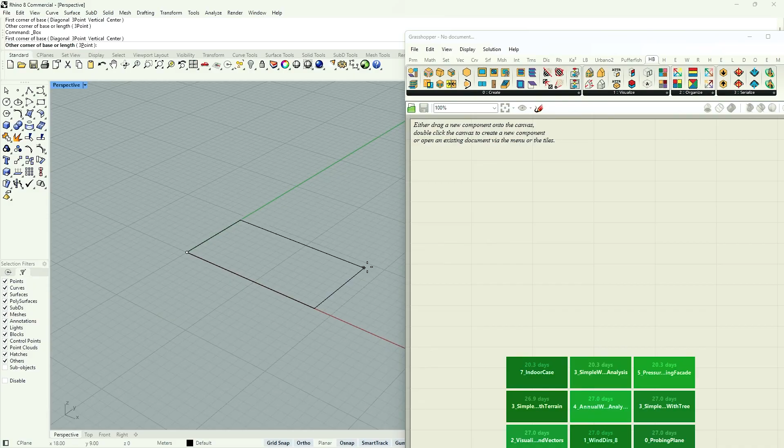We'll keep it simple. So we built one room, and we can make a box. Most rooms are boxes. I would say maybe 10 meters, 15 meters long, 10 meters deep, and maybe around 4 meters tall. Could be a smaller office room. Very simple box, but yeah, that's how we start.

And then we can go into Honeybee. By the way, you have to remember to install Radiance for this, you need Radiance. Here in these drop-down menus we have Honeybee, Honeybee Radiance - we will need this - and Honeybee Energy, which we probably will not use in this. We might use it actually, but let's see.

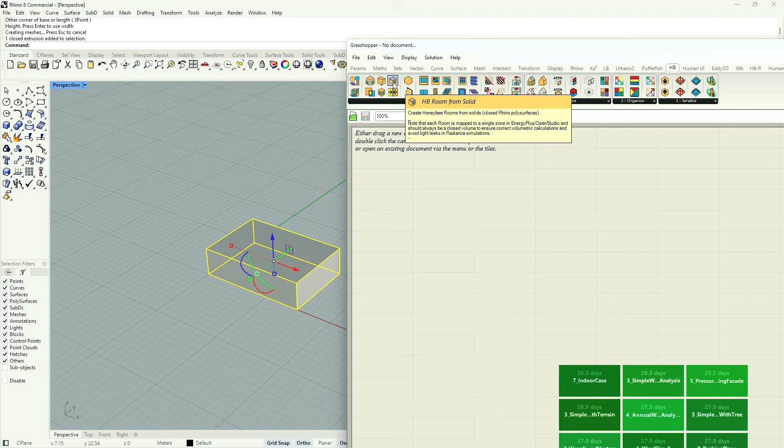First, we need to build a Honeybee model. This is the biggest part of the script. Because we have a box as a room, we can use this Honeybee room from solids. Okay, takes a while. By the way, I need to check my versions here. Yeah, that seems fine, that's how you can check if everything's fine. We're in Honeybee 1.8 and we have installed Radiance 5.4. That should still work, otherwise it will give me an error.

All right, we can put here the geometry. We should give this a name: room 1, right? It needs a modifier set.

So there is modifier set, there's construction set, there's program. The modifier set will actually give us information on how Radiance will work with the room. It depends if it's an indoor or outdoor analysis, and if it's about heat gain, or if it's about the visual aspect.

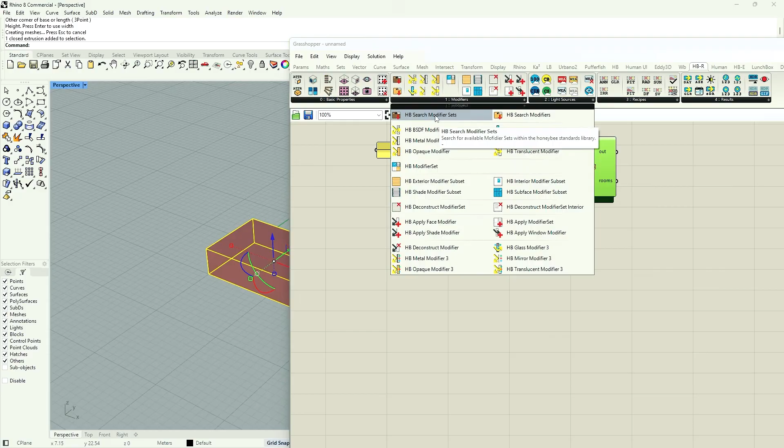So how can we change that? There is a default. What we can do here is go into Honeybee Radiance and check the modifier sets. I explained these quite a lot already, so I will just find a modifier set - there are pre-made modifier sets we can use, and this is this tool here: search for modifier sets. We can create our own set, but we will not cover this in this video.

Now, on how to do this, we can put here a panel and see what's in there. There's not a lot of stuff in here. There's a generic interior visible modifier set. That's what we are looking at. We want to know the interior of daylight.

So how to select this? It's not the best way, but you could use a list item, or have another panel and type interior, and then we see there's two different ones, the interior solar and interior visible. Solar is if we want to check the solar gain.

In that case, we want to have the visible modifier set. So we can type this, and now only one of the sets is shown here. With that, we can put this into the modifier set. We cannot have two different modifier sets. Also, only one is possible here.

Now, we don't need a construction set, because a construction set is about the energy calculations. That would be if we use Honeybee energy. So we don't need that.

Program, I will keep it for now. You can look for programs, definitely, but let's keep it simple, and whatever is in here, that is the generic office program, so it's an office, it assumes this is an office room. Condition, yes, we keep this. It doesn't matter for us anyway, because it's a daylight study, and then we have the roof angle, and that also doesn't matter for us for now.

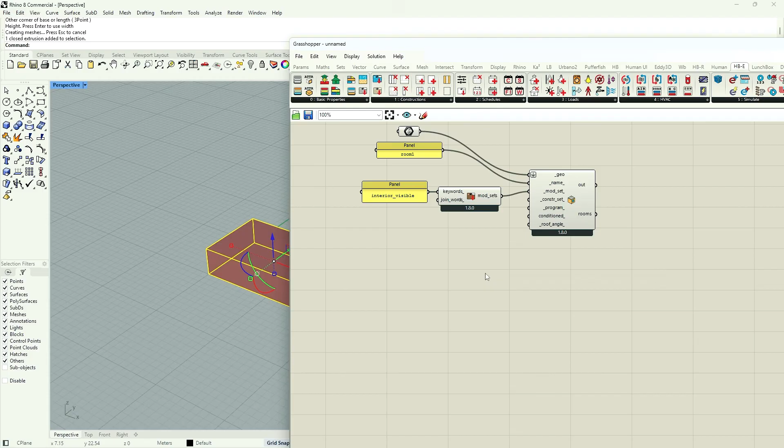As I said, this is a very simple script, but really important.

Now, okay, what's next? We need windows. The most simple possible way would be that if I create now from this room, I could have more rooms here, but in that case I have only one room. Imagine this is part of a bigger building, just like a room on one side of the building, and it has only one side with windows.

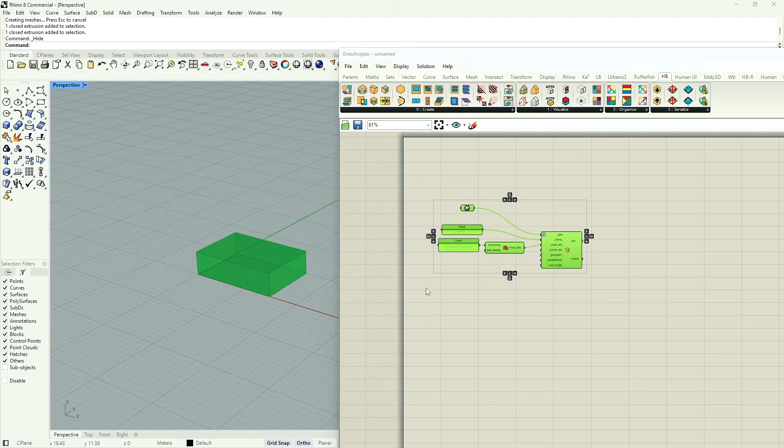First of all, we could give this like outlines, we just see the box wireframe. Oh, sorry, that doesn't work because it needs to come from here. And now we can hide this. Yeah, so this is easier to work now. So this is a tool, it just generates like a wireframe of your room or model.

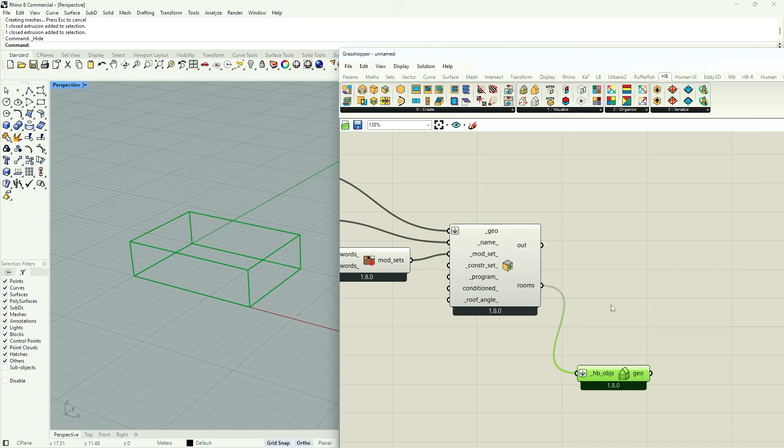It says here Honeybee objects, and a room can go into a Honeybee model. Oops, Honeybee model is this one here. We create a Honeybee model. Without that, nothing really works. So we can put the rooms in here, and that will create our Honeybee model.

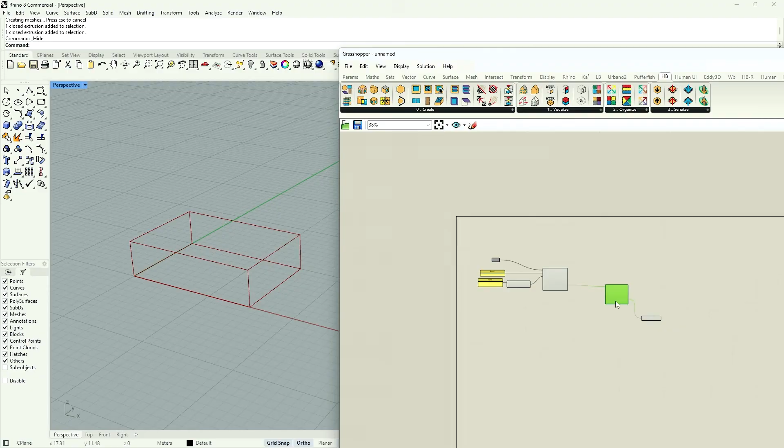And now, ideally, we put this here, because then we can see whatever is plugged in between. All right, so that's how it should look like. For now, we'll just add a window, and we play with the size of the window and the location. And the best way here is to work with Honeybee Apertures by Ratio.

So how that works really is, we have a room, but now we modify the room to have windows. So we go with the Honeybee model, with the room, Honeybee room, into here, and then from here we go into that. What happened here?

We need to first create a ratio here, but there's also a tool which allows us to create a ratio based on the side of the building, and this goes into here. Now it's all 0 at the moment. You can have a slider, and you want to put here a float point slider, and this cannot be 1. It needs to be below 1, so the maximum is 0.99 and minimum is 0.1.

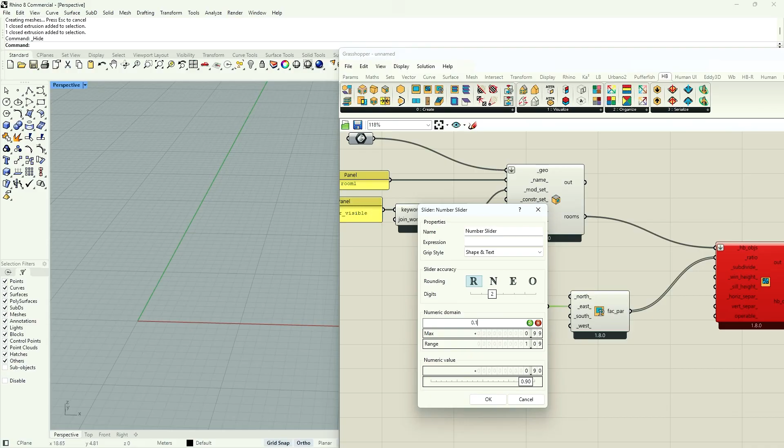And you can see now where that is. That's not good, let's put this to the south side. Okay, disconnect, let's have the south side. So far so good. You can see, because we put our wireframe tool here, we will always see any updates right away. Let's stay with this.

Now we can here decide if we want to subdivide or not. That's just a very simple toggle, a Boolean toggle. If it's false, it's like this. If it's true, it's a subdivision.

That's more realistic, really. The sill height is the height of the sill of the window, so you can shift that, and we can put a bigger number here, maybe 3 meters as a maximum. But yeah, with that we can play as well.

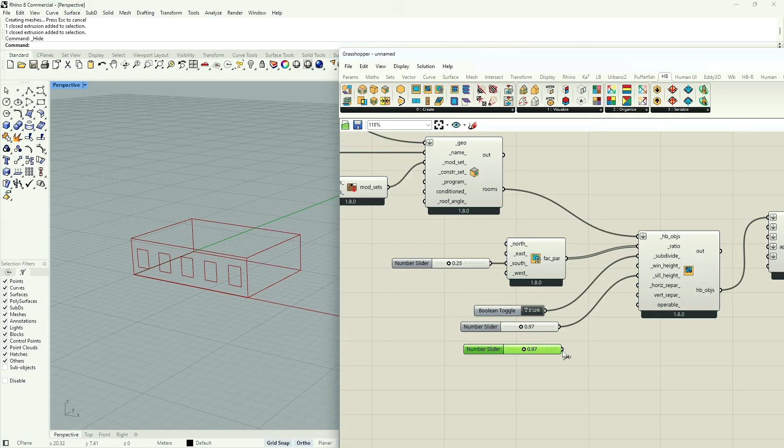And then we could have a separation, horizontal separation, how far is that? And that also influences how many divisions there are. It's a bit strange, but maybe maximum is 4. This doesn't look too bad. So that's a way to change this as well.

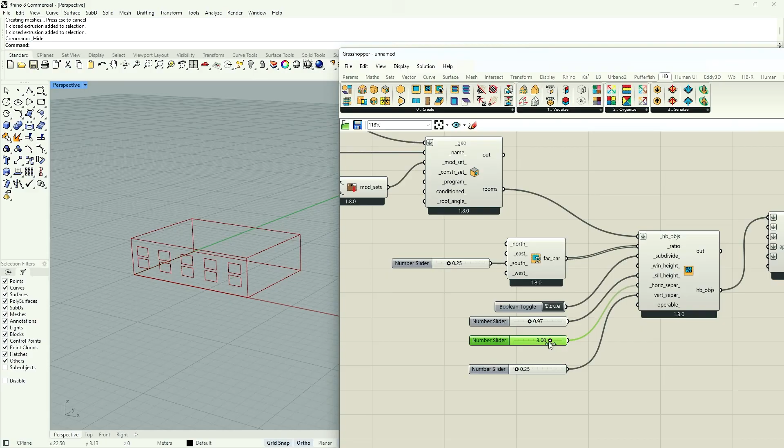And then we could separate that vertically, so we could have another slider here and change that. You can do quite a lot with this, really. You can explore a lot on how you want to divide this, just to make it more realistic.

Now there are other things you can add, but I just recently did a script. If you want to download that, if you don't have enough time, I will provide the link, although it comes with a small fee, because it takes time to put these things together and think about it. But yeah, that would be another option for you. Now this is like the simplest version.

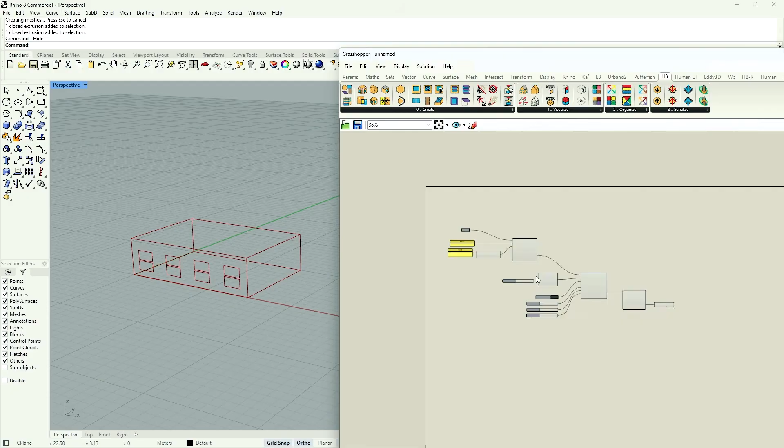Okay, so what does the script really do? What do we really want to know? We want to know, over the course of the year, how much of the time can this room rely on natural light? A typical goal would be 60% of the time.

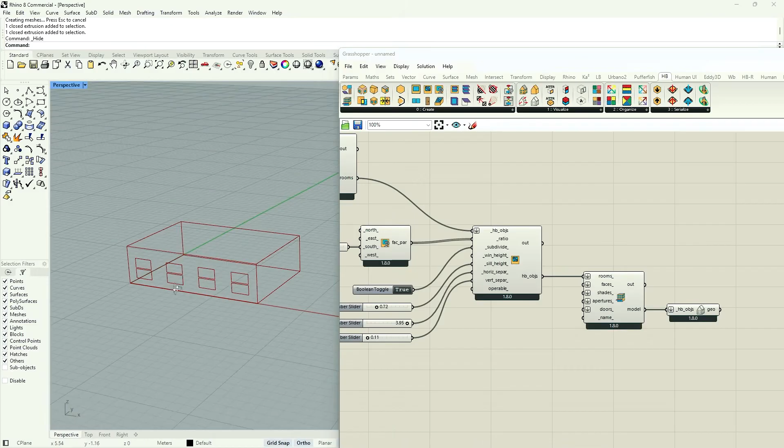But what does that really mean, 60%? In order to measure how this light is distributed over the whole footprint of the room, we need to introduce a sensor grid, measuring per sensor how much light it receives. We could use the radial grid from rooms... oh sorry, actually we want to use the Honeybee sensor grid from rooms.

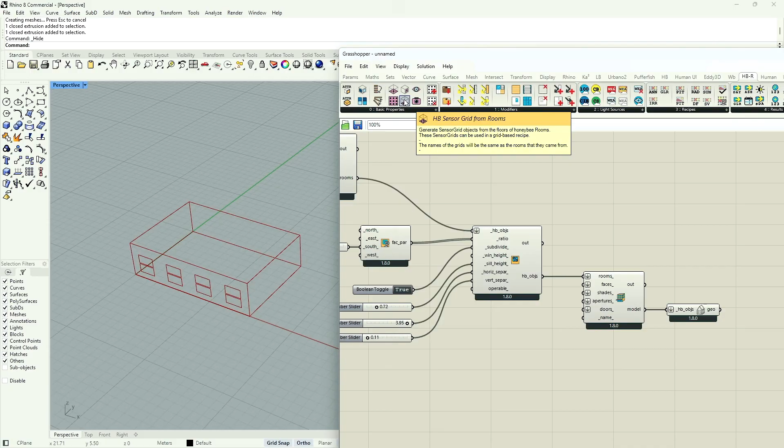So again, we have rooms, we have the model, but this is asking for rooms, so we need to put this here. Now it asks for grid size, which is in meters, so we can use a number slider. I'll put this at 1 meter. 1 meter is good, but we can make it smaller if we want, let's do 0.5 meter, that's fine.

The distance from the floor is also quite important, because imagine this is an office, and it's really about how the light is distributed at the height we will work in that room. If you're standing in a room it might be different, but if we have an office with tables, we might want to push this to 0.9, and our sill height would probably also be around that height.

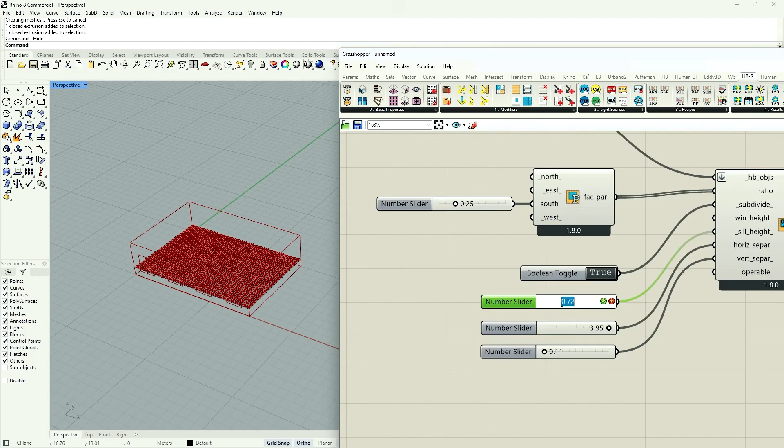Although big windows are great and nice, what we're trying to do is actually minimize the amount of window size, while at the same time optimizing the amount of daylight we get.

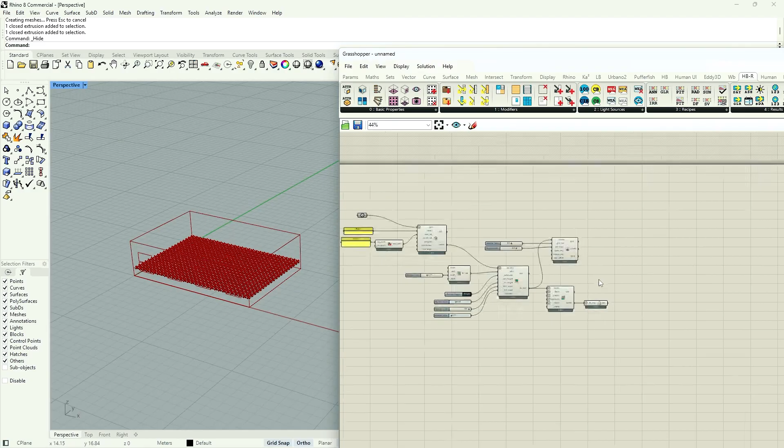Remove points which are outside—that shouldn't actually happen if there's any issue. If your solid is not a perfect box, it could happen that not all of your points are inside, so you would need this remove outside option. You can also introduce a wall offset, which shrinks the grid so there's no overlap of inside and outside.

So you have three outputs here: one is the grid, one is the points, which are the sensor points, and then we have a mesh output. So far so good, that's great. Now let's go to the analysis. We'll probably look at some others as well, but this one is really interesting for me: the Honeybee Annual Daylight. It has quite a lot of different outputs.

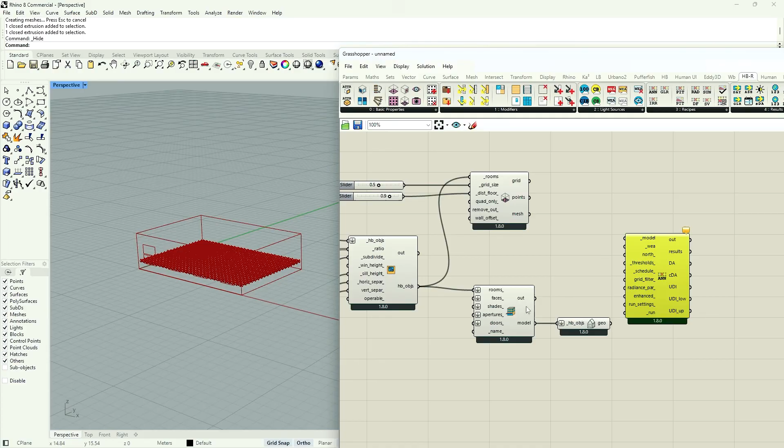It has the Daylight Autonomy, which we just discussed—basically the time on how much each sensor receives daylight over the whole year. In here we can place the model, that's the first thing you can place in here. And we also need a WEA component.

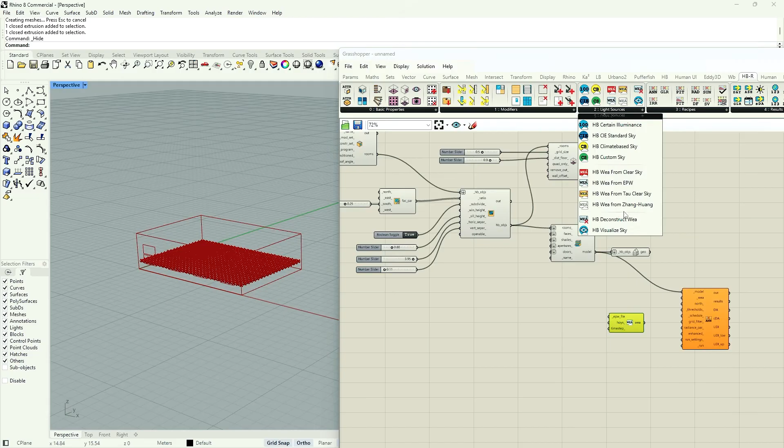It's either a generic clear sky weather tool or from an E+ weather file. I'll use this because it gives us the most accurate, realistic sky from an E+ weather file, but you can also explore the others—any of these would work. For that, we need an E+ weather file, which we can find in Ladybug.

So we need to go into Ladybug... we need this one, toggle, we need a panel here, and if I click this it goes automatically to the map. By the way, if you have any issues with this, not every weather file here works—some are outdated or have no data, but you won't see that immediately. I'll just copy this one; if you run into issues, just try a few different ones until it works.

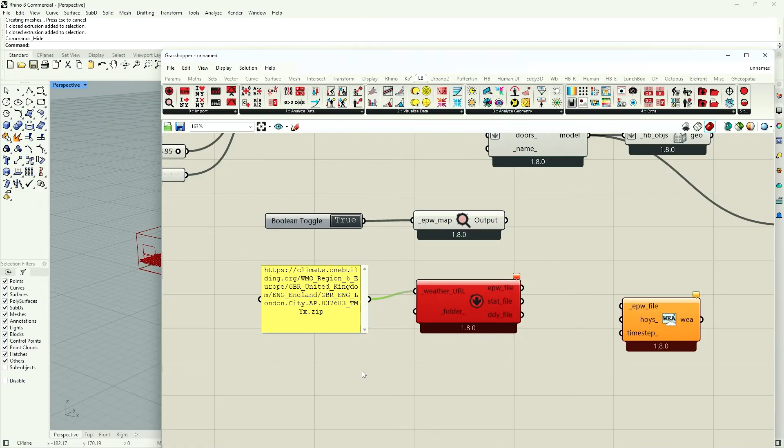There are other pages where you can download E+ weather files. The funny thing is, if we only use this annual daylight study, we actually don't need this in between—this is really just to create a period out of this, where you can adjust the time step. That will actually not work because it's an annual study, not a study over a certain period. So you could go in here like this, or like this, but leave this alone, because this will create a period, and that will not work with this tool here.

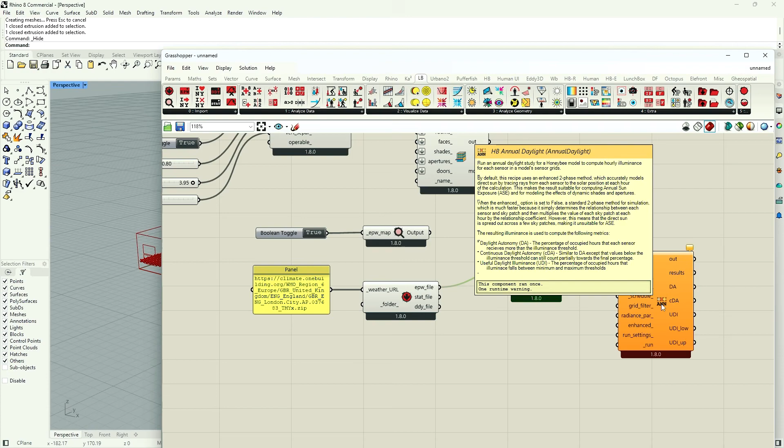Just keep this in mind—it's important because I think some people get this wrong. I definitely got it wrong. So make sure you understand that: it's an Annual Daylight Study, not the 'month of June' Daylight Study.

There is way more in here. I will not touch that. There's the threshold of the useful daylight illuminance, for example.

You can put here a schedule. This is, again, anything with an underscore on both sides is not required input, but it has a default value. If you have more than one room, you can select here with a grid filter. For that, it's very important that your room has a name. Very important, so you can actually filter it out.

You can add radiance parameters here. And this one is important if you run an additional ASE study. At the moment this is set to true. If you set it to false, then it's a more simplified study. So let's keep everything on.

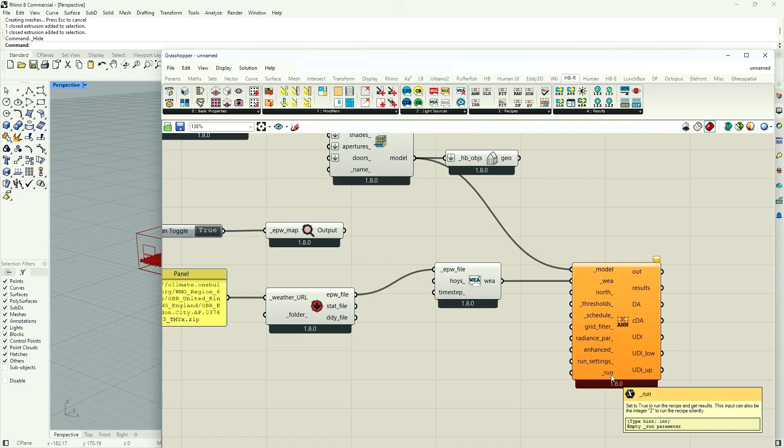And then there are also other run settings here. We can leave that for now, you can read about it. You can have additional settings, we just keep the default here as well. And then there's a run button, a run input. For that we again need a toggle. We can just copy one here.

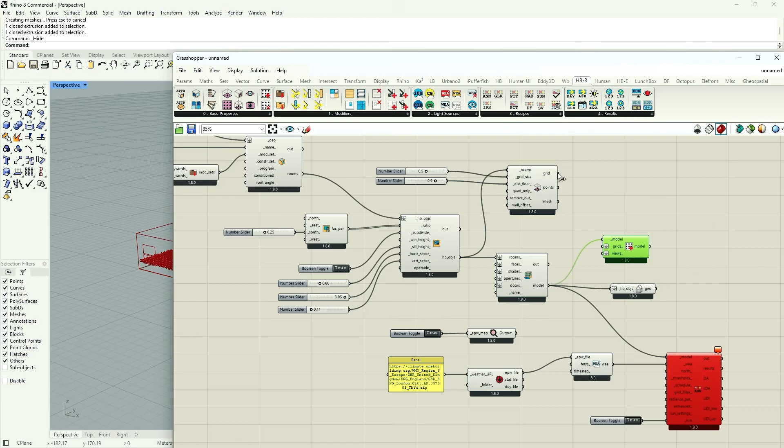Oh yes, of course, I always make this mistake. So we haven't done anything with this. Of course we need to apply this grid back to our model. We haven't really looked at that. And the way we can do this is to assign Honeybee grid. So basically we need to use this, get the model here and get the grid that goes in here, and that goes into the model.

And it's already starting running. So if you see this window, then that's a good sign for you, that means it works. Okay, now you say, oh but there's nothing here. Yes, there's nothing here. Also, let's hide this, don't want to see this now. We have a few outputs here.

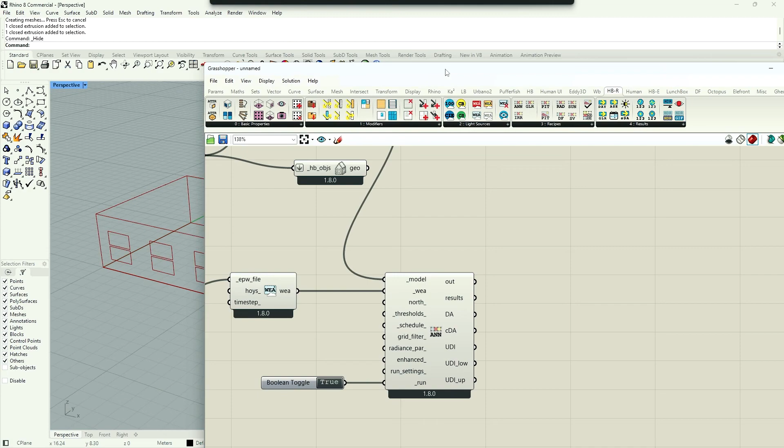That's also probably important. Let's go to Ladybug. And from here we can take the Ladybug spatial heat map. We can put the values here. Still not working, and that's why we have this mesh output here. And that will give us the output.

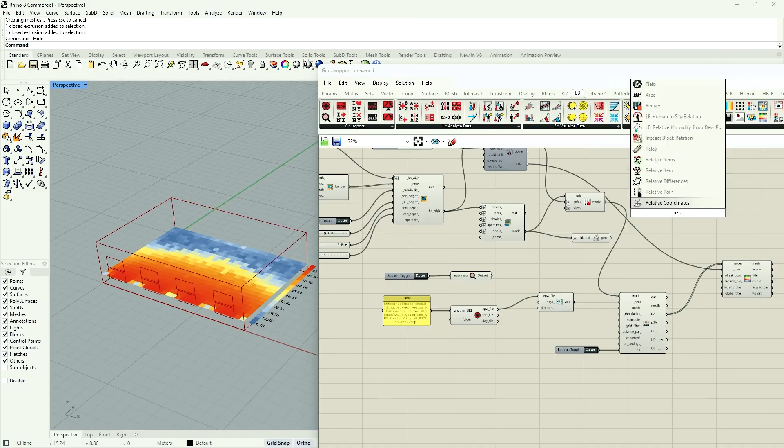All right, so let's put a relay. It's nicer to have a relay. So what can we see now?

We're running a very simple annual daylight study using real weather data from London. And we use a very simple schedule from 8 in the morning to 5 in the evening, weekdays, because it's an office. So we basically created our windows, we created our grid sensors, and now we have an output.

And you can see already there are some areas that are quite blue and others are more red. So okay, now we have a pretty solid script that gives us a nice output. There are actually different outputs here.

So one is the daylight autonomy, this one here, which basically checks the percentage of time it has daylight per sensor point. Then there's another one, called the continuous daylight autonomy. We could put this also in here to see what's the difference. You can read what that all means, but you can see it kind of reaches from 53 to 91. Actually, this is pretty good.

I also changed a bit here. I changed this slider from 0.2 to 0.24 to 0.3, and I also moved the sill height a bit upwards. If I do this even more, let's see what happens.

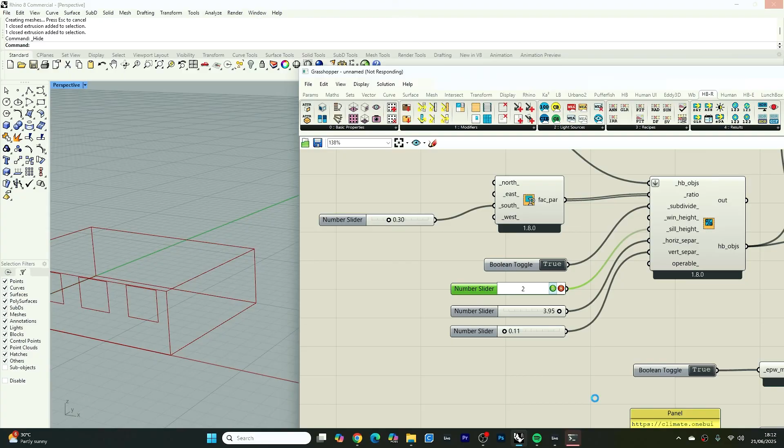That's actually even better. You can see that it lowers the ones which were already in the red zone, but it increases the ones which are more blue. Actually it lowers the ones which are blue. So that's really good, that's quite good already.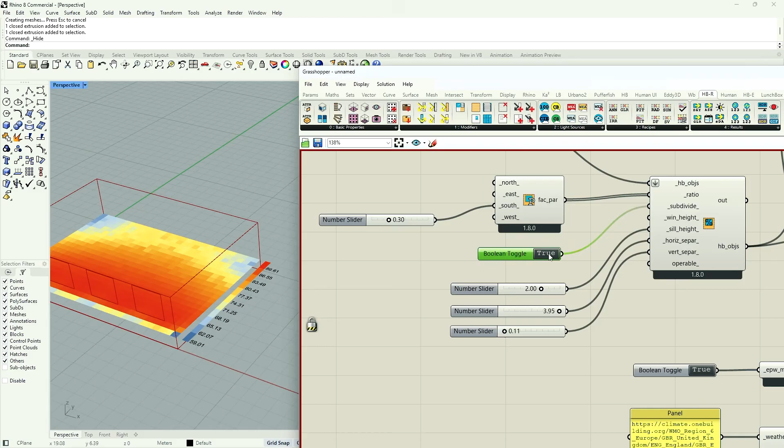I mean, we could play a bit more and see how this would be if it's just one continuous window, more on the top. Let's try that just very quickly to see how that works. We could go on true, false, and let's turn this off for just a moment so we can test this a bit.

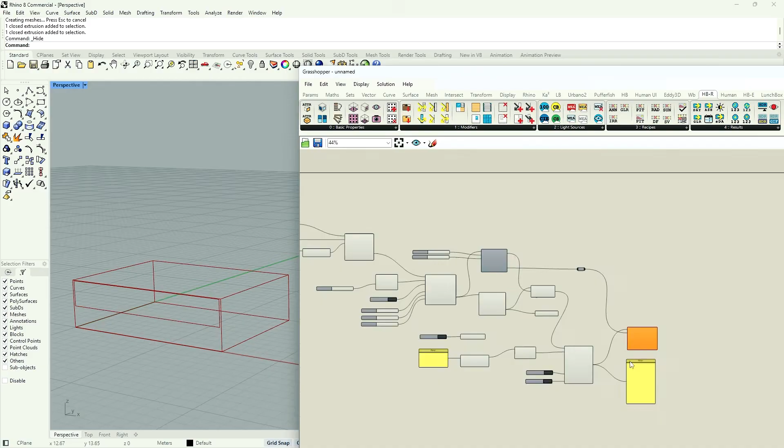Interestingly, it doesn't do anything. That's really weird. If it's not separated, not divided, it just creates this. That's interesting. Okay, let's change this back. It's more interesting if... well, we can just try something like this. I don't know what that gives us, but yeah, let's see.

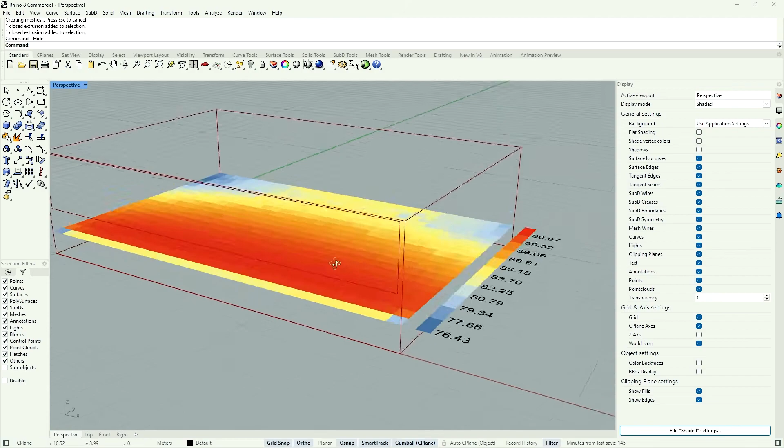So just testing what happens the further up the window is and how that influences the output. Very often buildings have the glass at the lower side, like floor-to-ceiling glass, which is great, it looks nice, but actually it has less effect. See, the further the window is up, the better. And at the same time, it makes sense to keep it.

So if we would do now the opposite, so we put it on the ground, we could move the sill height down. Let's see what happens. Oh no! Stop, that's not what I wanted. Okay, let's have this on the lower end.

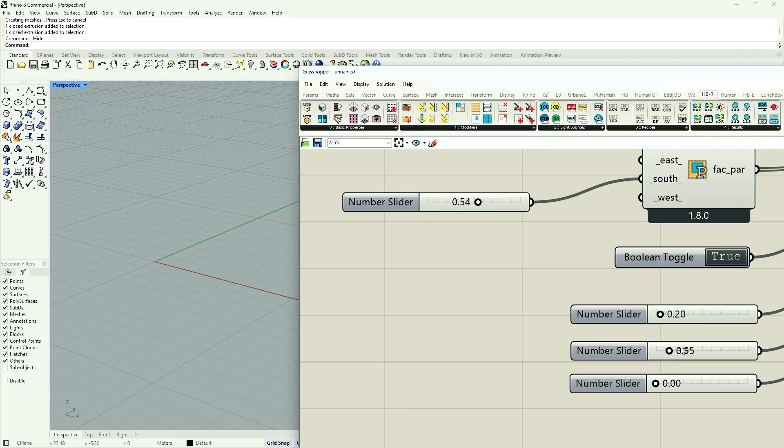Some architects think this is really cool, to have it on the lower portion. Let's run this again. Not too bad, but not as good as the other way around. So you might get your floor lit quite well, but then everything in the corner and the back is much more dark. All right, okay. So, but now, is there a way to look at the average?

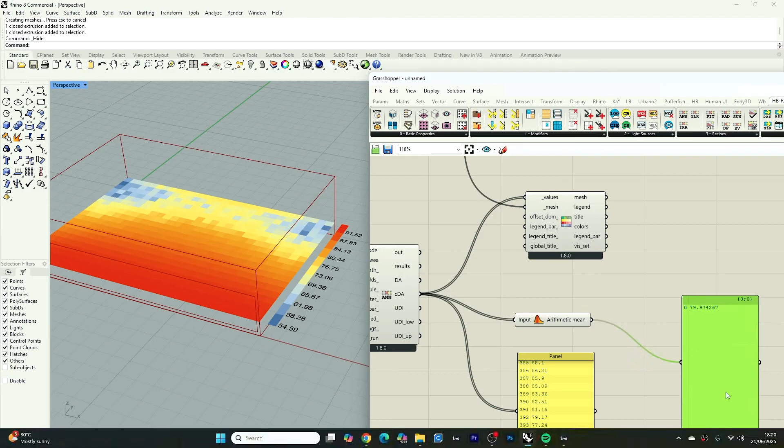So now if I go here and use average, put here the panel. Yes, it's average 80%. Sounds really good. But then we have these ones which are actually darker, quite dark. Not so dark really, because we have this really big window.

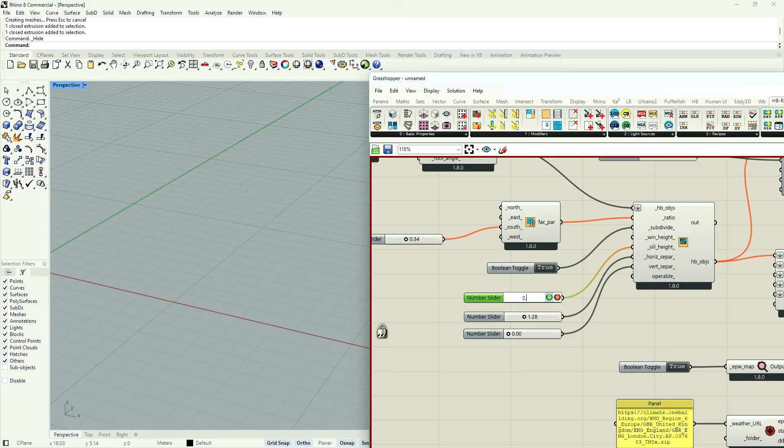So let's go back to a more typical version, which is 0.3, and of course we also want to minimize that somehow. And then this one, sill height 0.8, and let's try this again.

Okay, nobody would build this type of windows. Similar. So the most successful one was where we had the window on the top. Nevertheless, okay, so here's actually better now. You can see it's better, probably because of the windows here on the top.

But is there another way to measure this, the average? So what we could say is that instead of looking at the average of the output, which doesn't give us a lot of control, we could say let's subtract, let's say the 60%. The 60% is our goal.

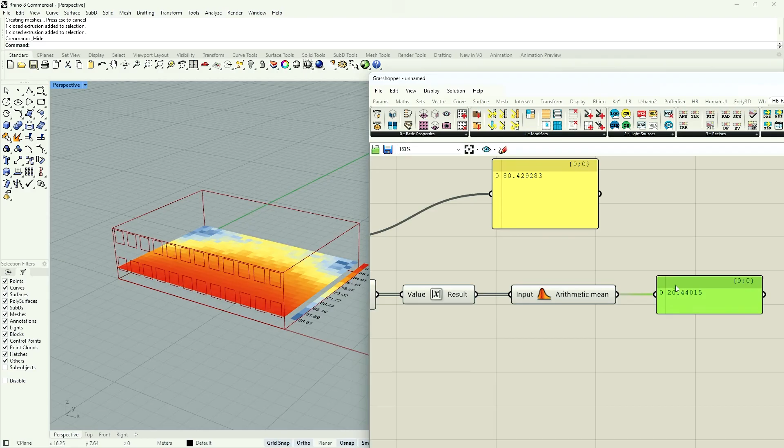We subtract that and we can then use the absolute value. That means we remove all the negative numbers. And from that we go in here, we average everything and we can see where we are. And ideally, we should try to get a number. The smaller the number, the better. This is also a percentage. That means 20% of that room actually don't get enough light.

Now we could argue that ideally a good value would be below 10%, I guess. And if we want to be even more strict, we could go here.

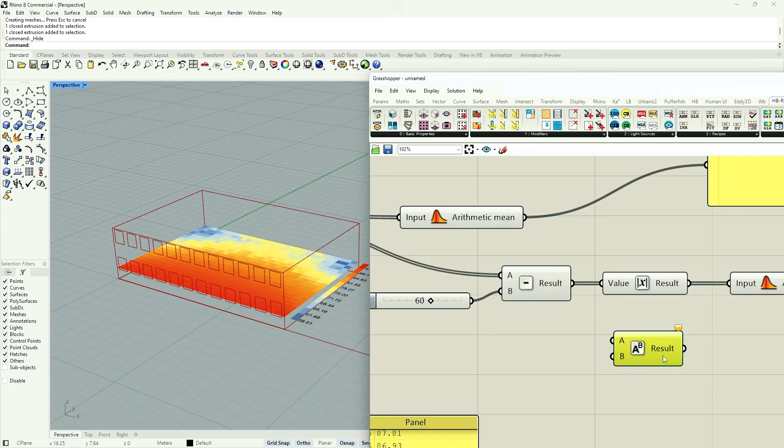Calculate the power. So we call this the average deviation, the mean absolute deviation. This is pretty straightforward. It's pretty good. The lower the average, the better the uniformity near your goal daylight autonomy.

And then what I'm doing here is called the standard deviation. It penalizes extremes more. So if we then go here, we would average this, and then we use the square root. Let's see, there's a bit of a slight difference.

It actually says here 22% is not great. 22% of the room is not great, whereas here it's just 20. So it's a bit more strict. But that would be another way to calculate that.

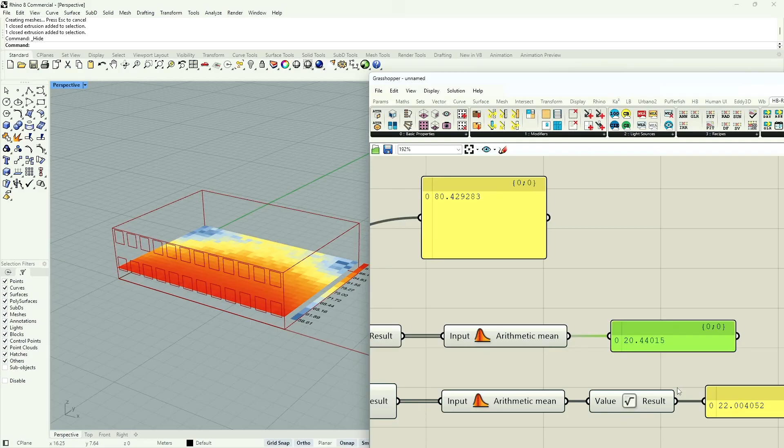So ideally, you can see already that it says here 80%, like the average is 80%, which sounds really good. But actually here, it would be great if we can go lower than the 10%. So the smaller the number, the more evenly the light is distributed.

I'm aiming for a mean deviation of under 10%, or a standard deviation from 22% to be below 10%. Sorry, what I'm aiming for is the mean deviation to be under 10%. That means that most of the points are within about plus minus 10% of the target daylight autonomy. So it's better than just getting the average.

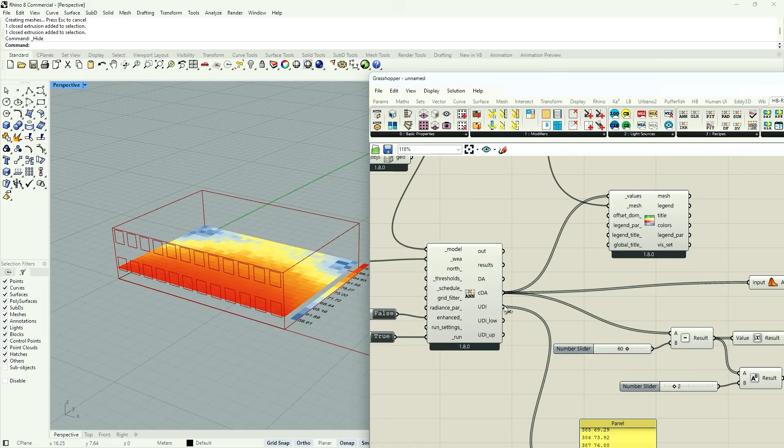Percentage of these points. So the output here is slightly different. Now there's some other outputs here. There's the useful daylight. That does something very similar, I guess. So we could go into this, and you see, okay, useful daylight and less useful daylight, low values and upper values.

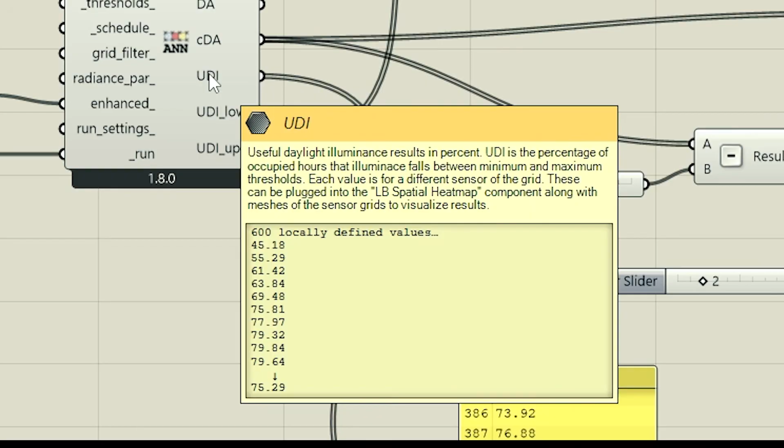So just read through this. The useful daylight illuminance results in percent. UDI is the percentage of occupied hours that illuminance falls between minimum and maximum threshold. Each value is for a different sensor of the grid. These can be plugged into the Ladybug spatial heatmap component along with meshes of the sensor grid to visualize the result.

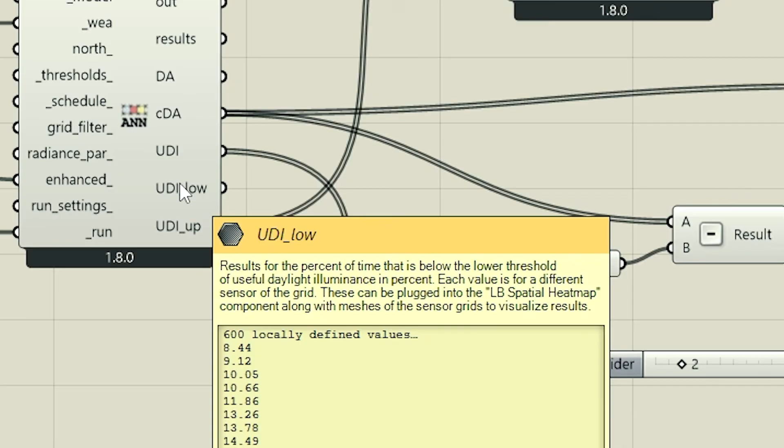And then you can separate the low and the upper ones. That meaning that for the UDI low, the result is the percentage of time that is below the lower threshold of useful daylight illuminance in percentage. Each value is for a different sensor of the grid. These can be plugged into the Ladybug spatial heatmap component along with meshes of the sensor grid to visualize the result. Yeah, just read through and try to understand it.

It always takes a bit, and maybe you need to read it twice. In any case, for me, this additional kind of output of the average deviation and the standard deviation gives me quite a lot of information already.

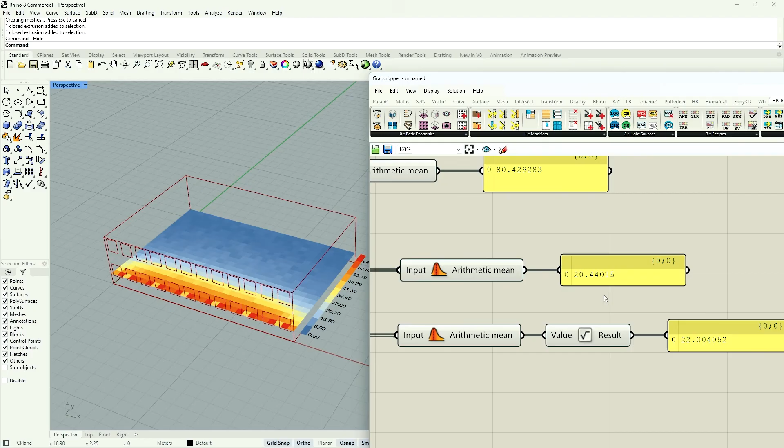All right, that's it. I hope you like this video.